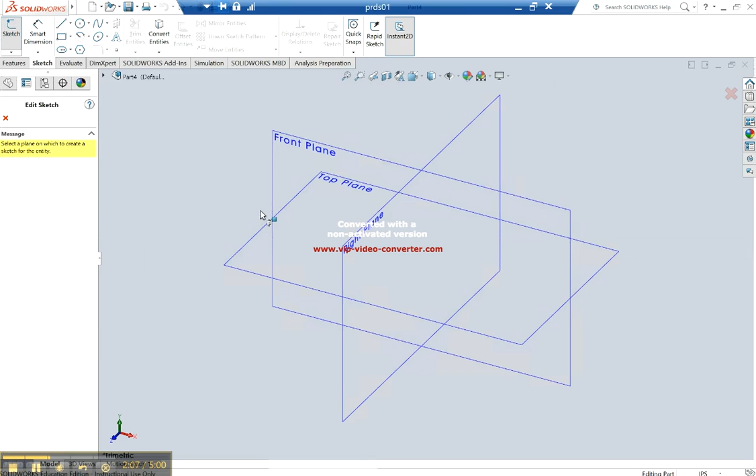In SolidWorks, let's open this up, a new part, get that opened, and we're going to open a sketch, and I'm going to do it on the front plane.

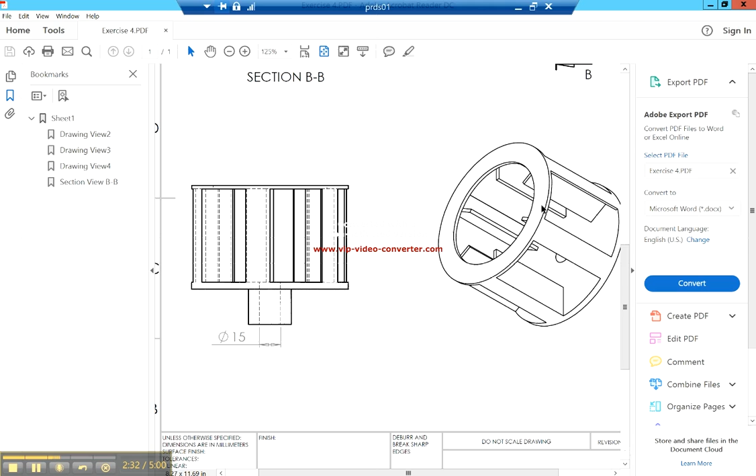Okay, if I look at this, I'm going to zoom in here because this is the area we want to focus on. I know if I just take half of it, just deal with this side. If I swing this rectangle around, it'll do a disc for me, which is ultimately what we have down here, a disc. Again, if I swing this block around, it'll give me a cylinder. If I left maybe a gap in the middle of it, it would leave the hole. So let's have a look at some of these ideas.

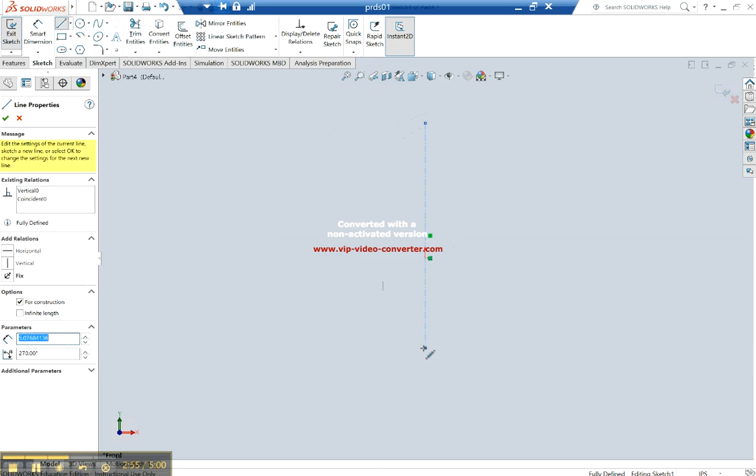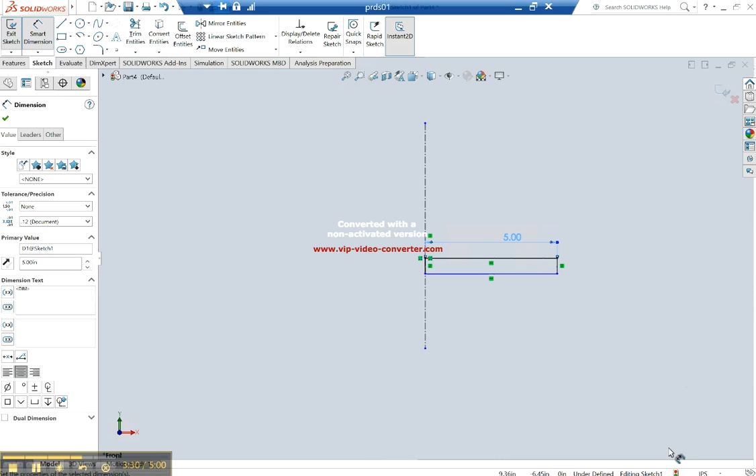I'm going to start with just a center line, just to give me my bearings. Put a center line there, and then from that, if I do a corner rectangle, this is going to represent my disc that's being swung around. So if I want to dimension that out, well, I know I have to zoom out here. The overall diameter, let's see where the overall diameter must be, this 55. So that's radius 55, so diameter 110. But we can just put in the radius because we're only doing half of it. And of course, in inches, obviously — a disaster when it comes to that today. So 55, and we said our thickness is going to be 5.

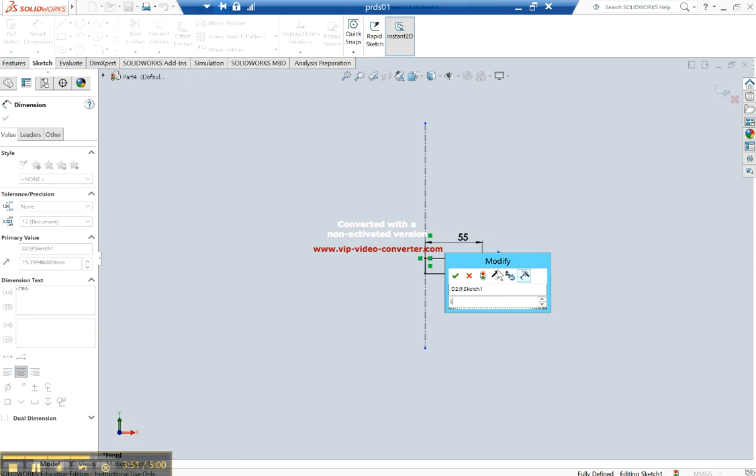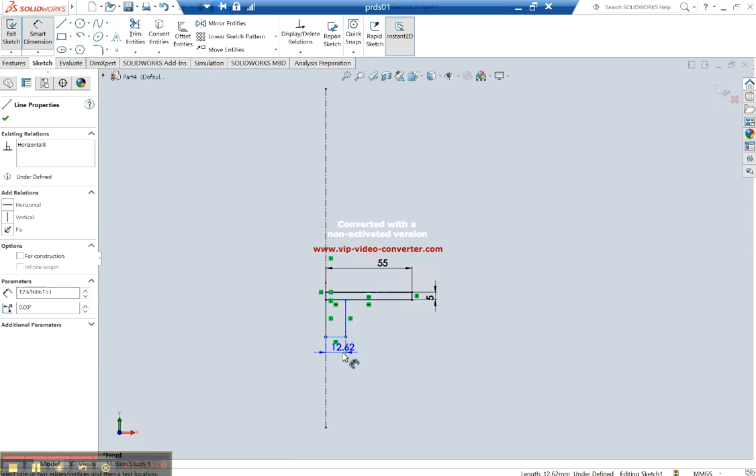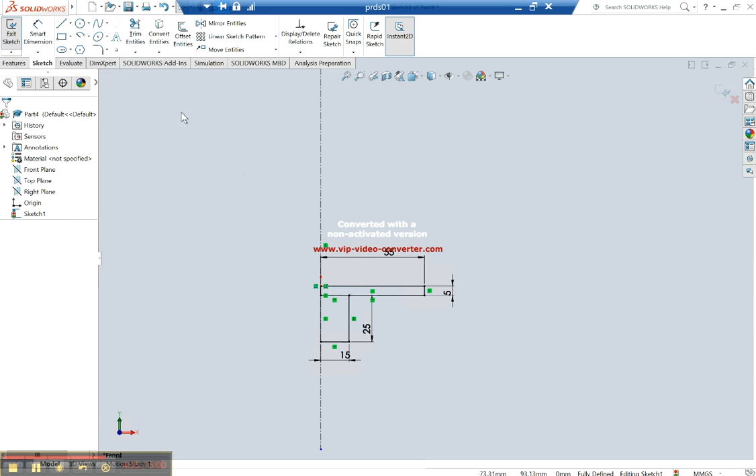So now, just to give you something to imagine it by, what we have at the moment — we haven't put the hole in just yet — but look, if I just go to revolve that around, if I take my axis as this here, I want to swing it around 360 degrees. See, I haven't closed it off here, so I've got to tell it what closed sketches I want to swing around, and I want to bring it around this axis here.